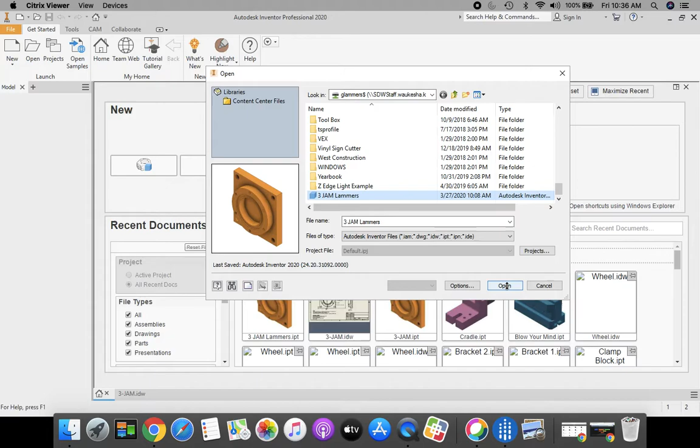To start off, we need to go up above our ribbon bar to these tabs at the top, and we want to select the CAM tab. The first thing we need to do is set up our part, so click Setup folder.

Here we're going to do something new, we need to change our origin. Usually we change it to model origin, but that would put it down on this corner of our part because that was our first thing that we drew. However, we extruded this out in the default direction, so it's actually higher than our model origin. So we're going to change this origin to stock box point, and then click our top of our bottom left corner. Right here we click, and that's going to change our origin. It's still on the top of the block.

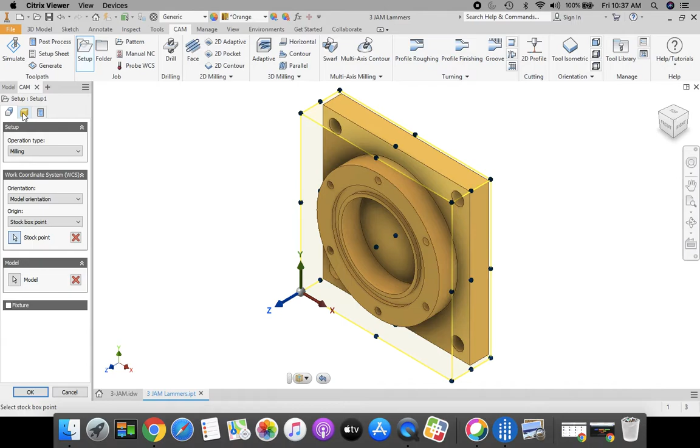Going across to our next tab, which is our stock setup, we're going to change stock offset mode to no additional stock, and see how that brings us right up tight next to our part.

Final tab over here, we're going to select the 1001 and we're going to enter in our part number. So here I'm going to type in my part, 3-JAM, and my last name. You're going to type in your last name here and click OK.

Next, the first thing that we're going to do is cut this area that's out here and this area in the middle. That's going to be done with a 2D pocket, which is very familiar to us. So we're going to select our 2D milling area, go to 2D pocket.

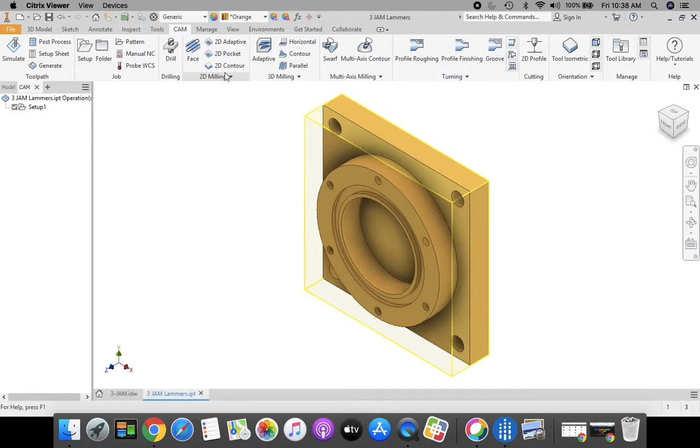First thing we need to do is choose our tool, so click the tool button. We're going to come down to either Sample Libraries End Mill and select tool number 2, 1/4 inch flat, or Butler MS Tool Library all the way at the bottom, still tool number 2. Select OK, that shows us our cutter.

We're going to go across to our geometry where we're going to select. I want the bottom of this square selected and the inside of our circle selected. Make sure you're on the bottom surface of that.

Next, we're going to establish our heights. So we're going to click on our third tab over. Clearance height, retract height, and feed height, we're changing all to model top and 0.2. So these top three are model top and 0.2.

Next, we're going to establish our number of passes, so our multiple passes. Since we were cutting 3/8 of an inch deep, that's a little much to cut with our end mill, so we'll need to take that in multiple passes. Come down here to where it says multiple depths, and we're going to change our maximum roughing step down, click in this area, to 0.25.

Scroll down using the bar on the right hand side where it says stock to leave. We want to uncheck that. We want to be right up next to that circle when we're finished.

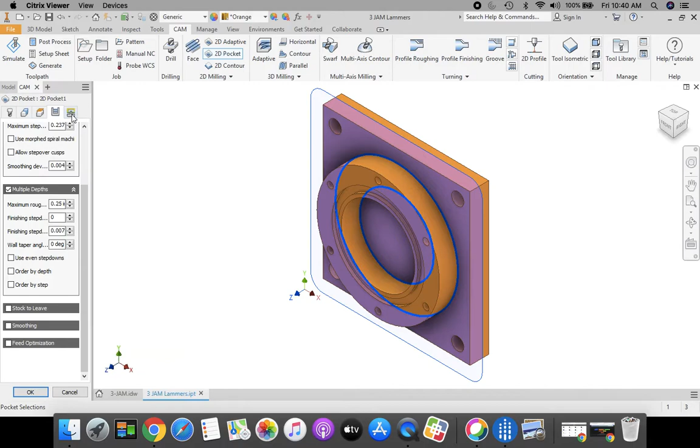Moving over to our final tab, leads and transitions, uncheck lead in, uncheck lead out. Helix type we're going to change to plunge, so our ramp type change to plunge, and then select OK.

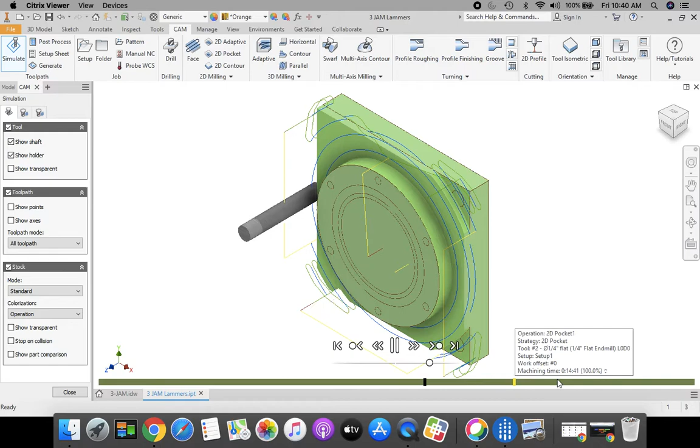Once it's done processing up here, we can click on simulate. I like turning my stock on here and click play, and it should come across, and it's going to cut multiple depths, taking that right up to the outside and inside of that circle.

Okay, that looks good, let's move on. The model browser on the left hand side, let's click close. Next, we're going to drill these holes that are in the corner.

So we're going to go up to the drilling area of our ribbon bar, click on drill. Now it shows me that I have a tool already selected. However, if you look in feeds and speeds, do you see the retract feed rate is at 0, so there's problems there. So let's identify a new tool. Once again, you're going to scroll down to Butler MS Tool Library and select number 2, 1/4 inch flat, or you're going to go to Sample Tool Libraries, End Mills, click Select.

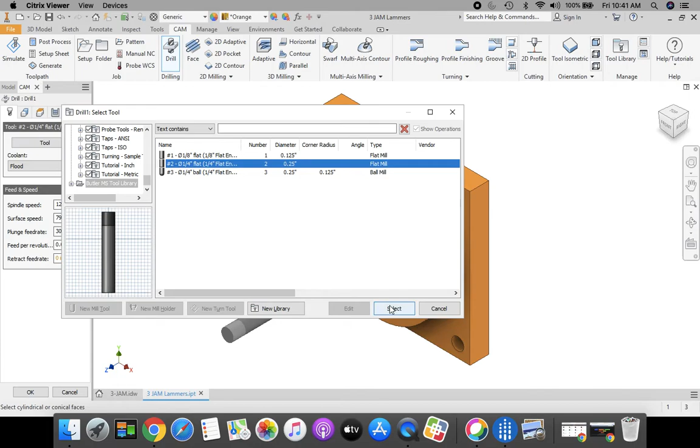Going across to select my geometry, I'm going to click each of my 4 holes.

Next tab over, I establish my heights. Once again, every time we do this, it's going to be model top and point 2.

Okay, last tab over is my linking tab, or cycle tab, since we're drilling. It shows me that I'm doing a drilling operation, and once it reaches the final depth, it'll rapid retract out. Click OK at the bottom.

Okay, simulate. Come across, I can fast forward down here at the bottom. It's going to cut everything out, and then it's going to come in and drill our 4 holes. That looks super good. Model browser bar on the left hand side, click close.

Let's go to our next operation, which is going to be these 6 holes up here. That's another drilling feature, so I'm going to click on drill.

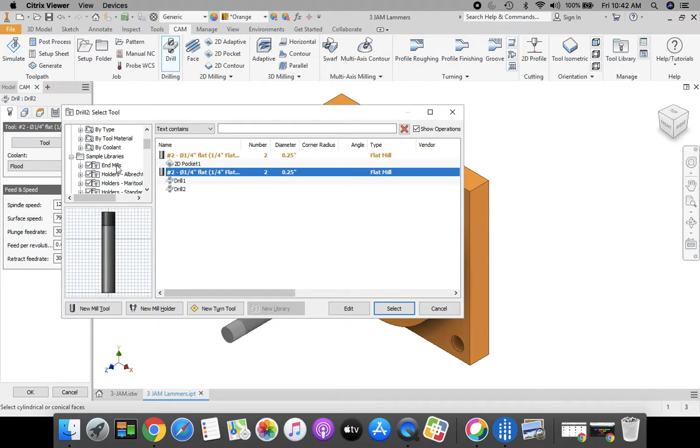Here I need to change my tool. Since a 1/4 inch end mill is not going to do it, I need to change this to Sample Libraries, End Mills. Click 1/8 inch flat, or Butler Middle School 1/8 inch flat. Click Select. Tool changes to a narrower tool.

We're going to drill that area out. So I'm going to go next to my Geometry tab, select my geometry. I'm going to click all 6 of my holes going around the top perimeter.

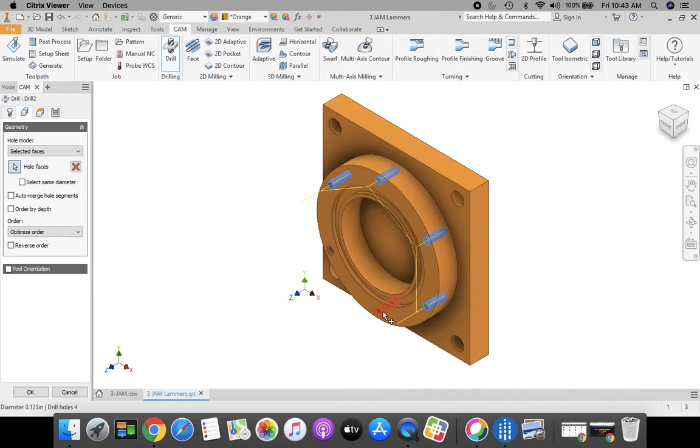Establish heights. Once again, model top and point 2 for each one of these. Okay, top 3, model top and point 2.

Then my linking parameters, my cycle type here, I'm going to drill once again and rapid it out when it's finished to the proper depth. Click OK at the bottom.

Okay, the last one that we're going to do is our contour of this area in here for the O-ring groove. So that's going to be a 2D contour. I'm going to come up here to the top, 2D milling, select 2D contour.

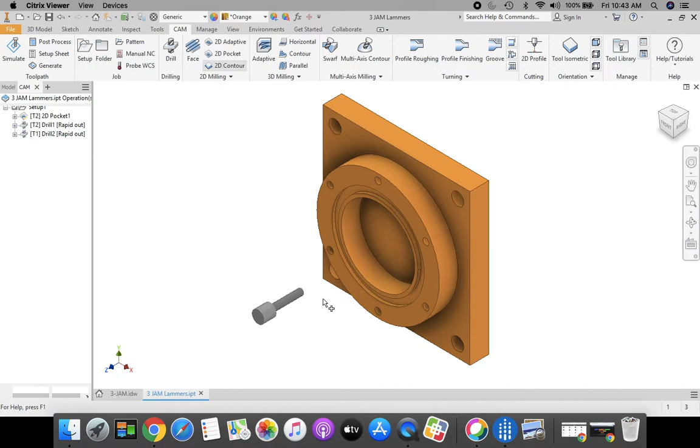Here I'm going to have to scroll in a little bit, and I want to get this inside edge, inside bottom edge of that O-ring groove. Don't come up here to the top, it's not going to be the right depth. Bottom O-ring groove is what we're going to be selecting.

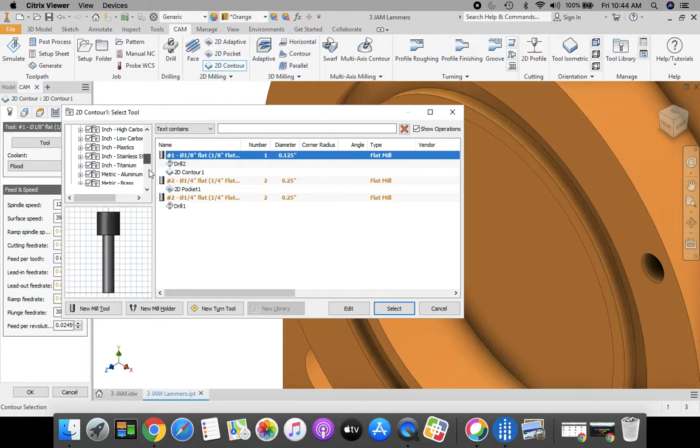Now first we need to get our tool correct. Over here on the left hand side we have our tool. We're going to scroll down to the bottom, Butler MS Tool Library, 1/8 inch flat. Click Select. That gives us all of our feeds and speeds correct.

Go to your contour selection. Remember again, I want that bottom inside edge selected, not the top. Bottom inside edge. Go home.

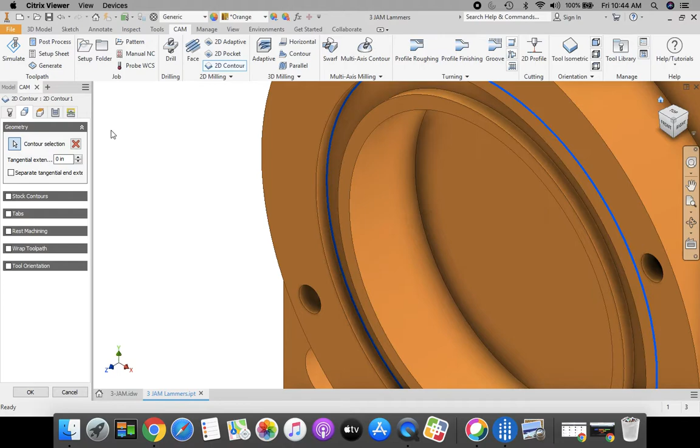I'm going to establish my heights, and you guessed it, once again, model top and point 2. Model top and point 2. Going across to my next tab over, number of passes.

Everything in this area looks fine, we're not going to change anything on that. Our last tab over, I'm going to uncheck lead in, uncheck lead out, and then click OK down at the bottom.

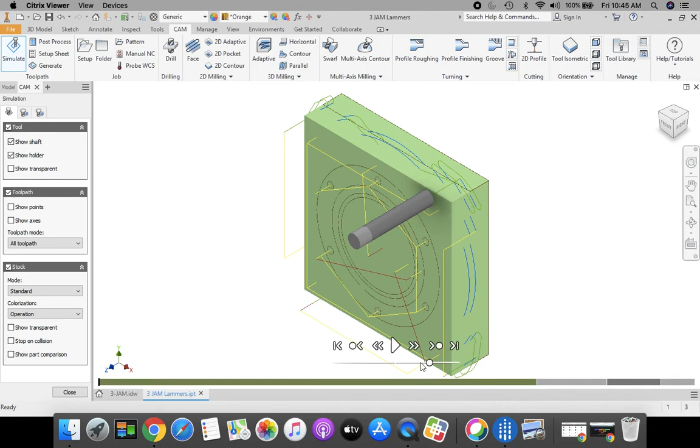Okay, to select all my tool paths, I have a pocket, 2 drilling operations with a tool change, and a 2D contour. To select all 4 of those, I'm going to click Setup 1, go to Simulate, click Play. I'm going to let that play all the way through.

Drilling the holes, switching the tool, drilling the 6 holes, and then we have that final O-ring groove that it's going to end up contour cutting. Okay, that looks super awesome.

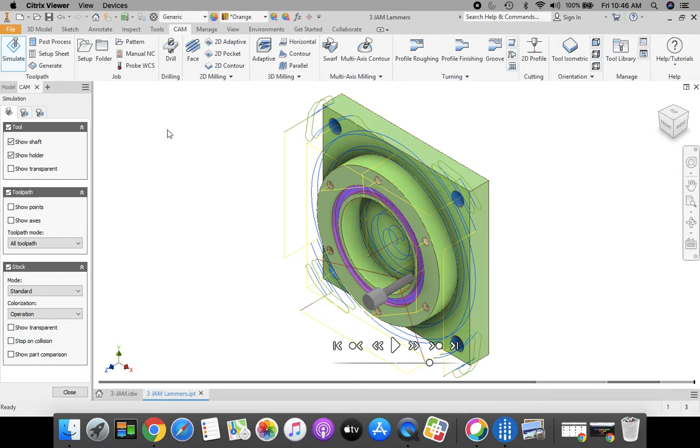Okay, we're not done yet. Next we need to post-process this. So next to simulate, we're going to post-process. We're going to make sure that this is going to our H drive.

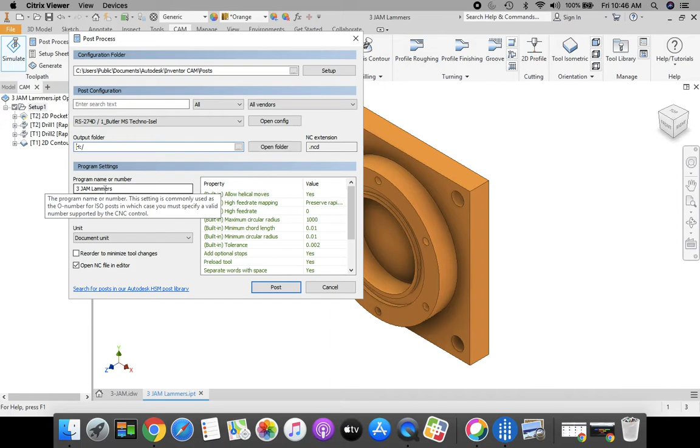If this does not say H:\ here, you're going to click on this gray box. Left hand side, select your H drive. Click select folder. My program part name already comes in there, 3jam and your last name. Click post.

Click save. Yes, we're going to save it. This X in the top right corner for the file editor, we're going to close out.

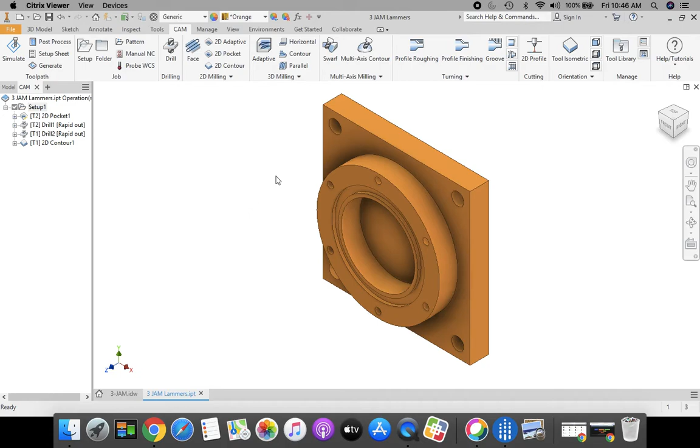And now we're going to resave this part that has the toolpaths. So I'm going to go to Orange File, go down to Save, and congratulations, you're done. The next thing that we're going to be doing is switching over to our IDW to turn in.

And here we're creating a section view once again. Pretty awesome. Looking forward to seeing you for that one.